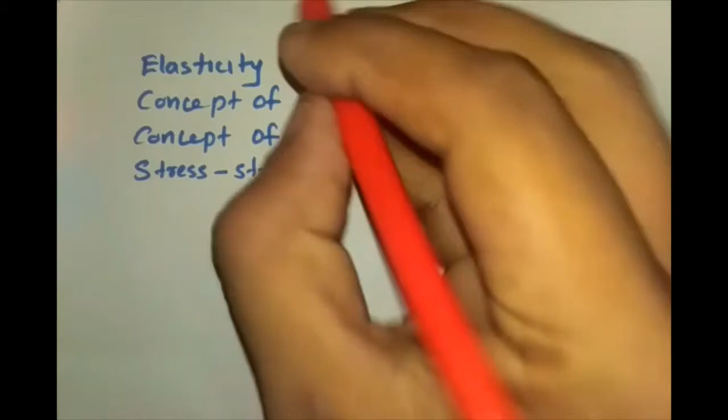Hello friends, in this tutorial we will be dealing with the basic strength of material concepts, that is elasticity, the concept of stress, what is stress, and concept of strain, and the stress strain relationship.

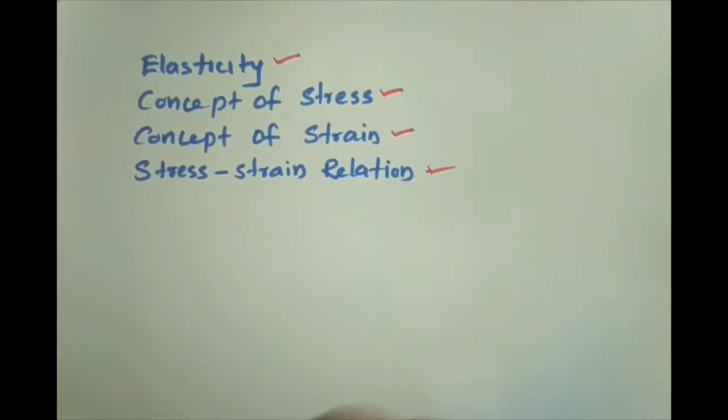So elasticity. What is elasticity? In simple terms, the property by which a body returns to its original shape after removal of the load is called elasticity.

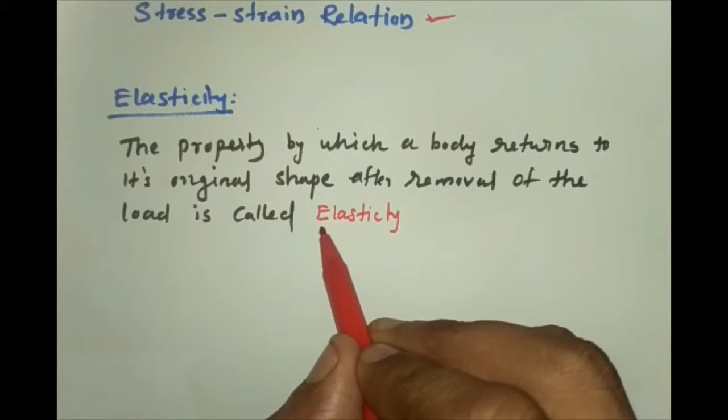I can give you an example. Here a hair ribbon is given, having a specific length. When you stretch it, this will increase the length, and when you remove the force, the shape will regain, so it will regain its original shape.

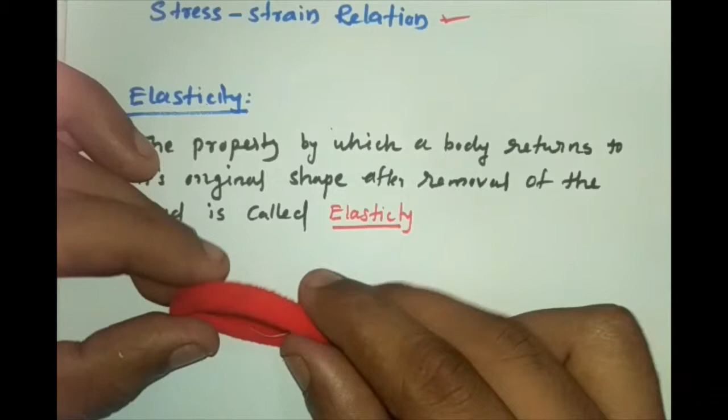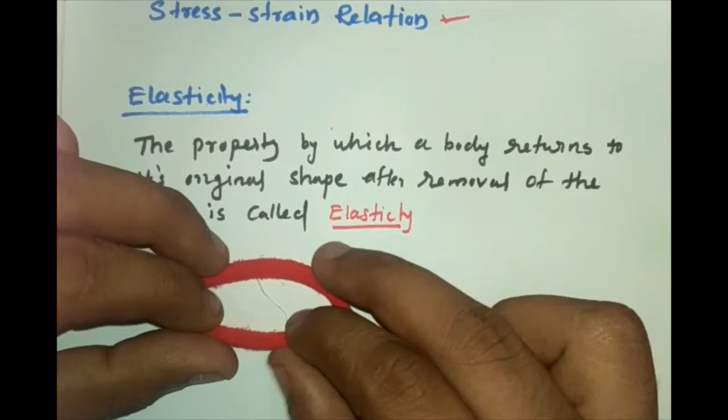So this material is an elastic material, and if it regains its fully original shape, having a length L, and when you stretch it and after removing the load, if it regains its complete original shape, then this is called perfectly elastic material. If there is a residual elongation even after the removal of the force, then that is not a perfectly elastic material.

Steel, wood, stone may be considered as perfectly elastic within certain limits. We will deal with the limit later.

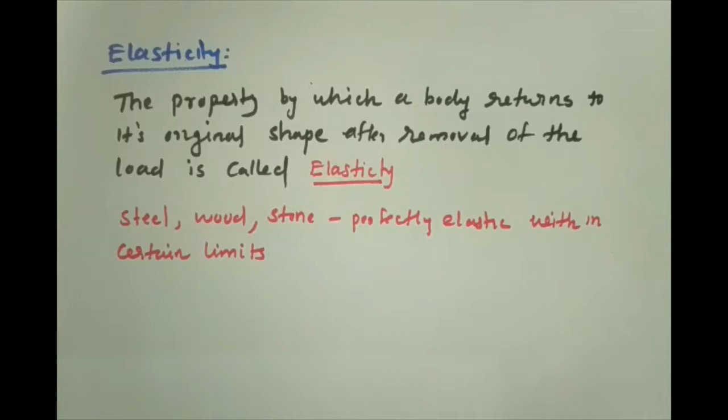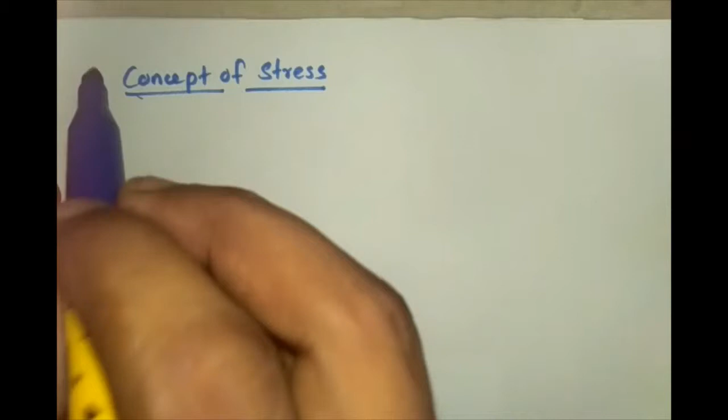Next is the concept of stress. What is the concept of stress? First, before that, I ask you a question: why do we need stress instead of force? This is a question for you, and after the lecture you will find the answer, and you can comment it in the comment section.

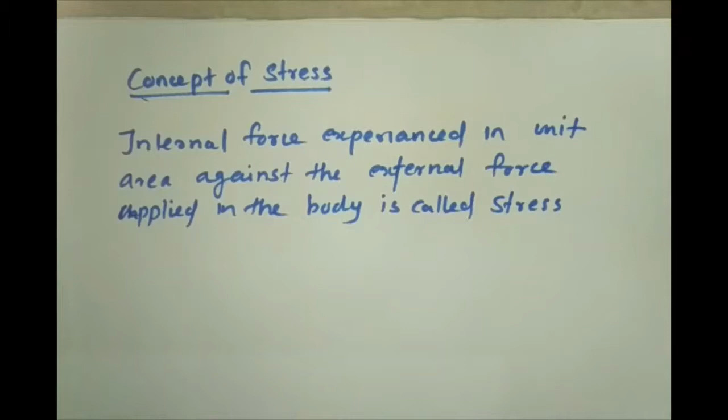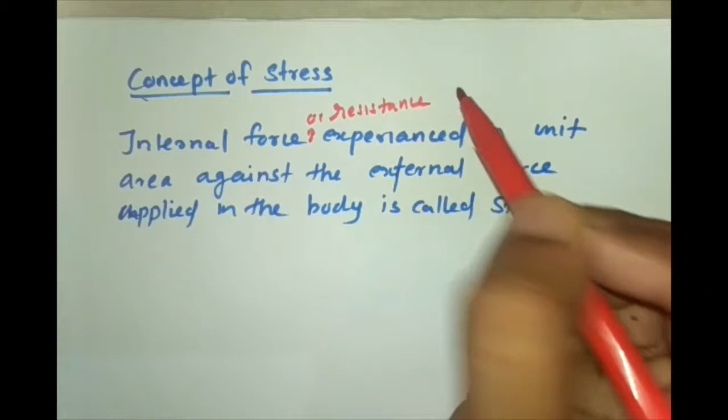So here we will deal with the concept of stress. Stress is the internal force, or you can say resistance, experienced in unit area against the external force applied in the body. This is called stress.

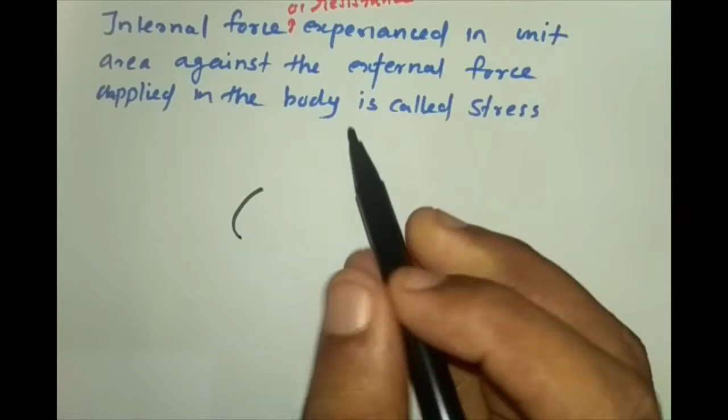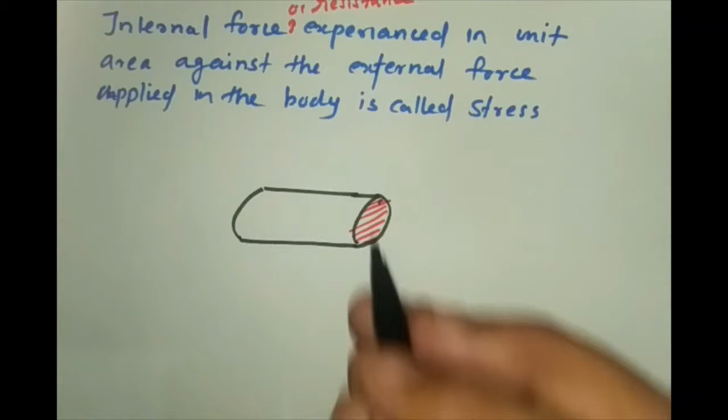So here you have a body having a cylindrical cross section area of A, and the force is acted in this way. If it is in equilibrium, the same force will be acting in the other direction. At the other end, P force will be acting here, and here also there is the same cross sectional area.

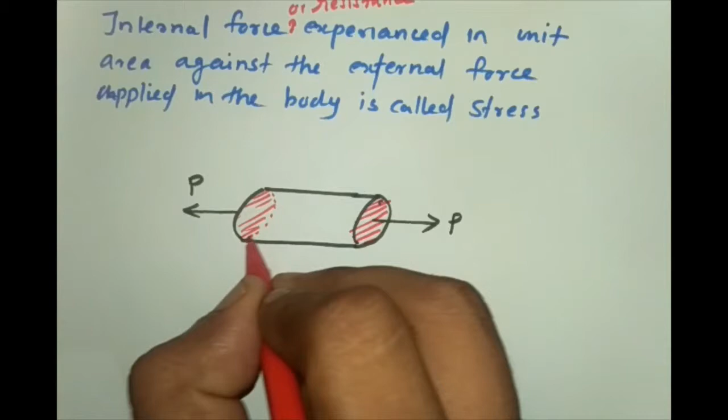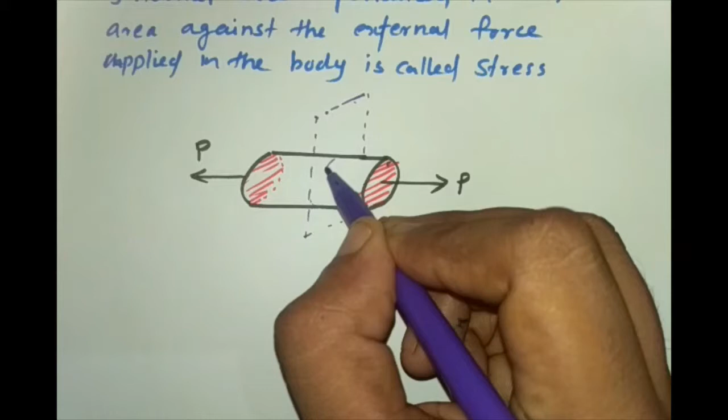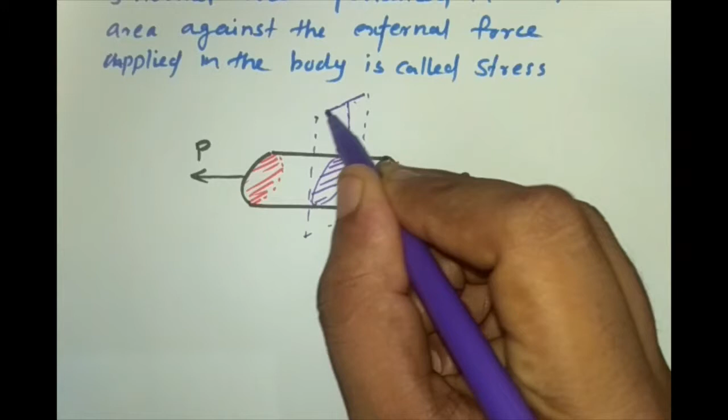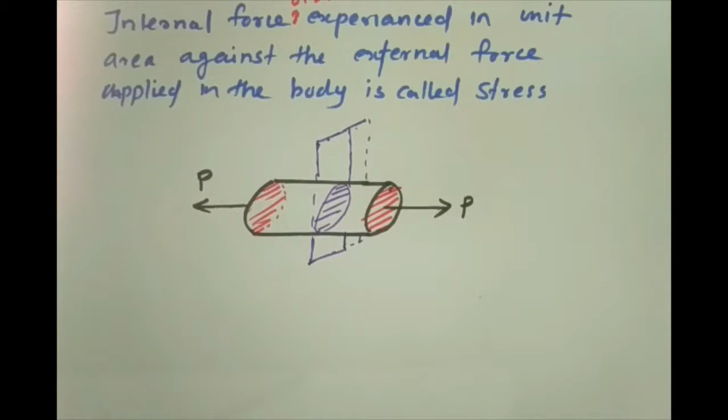Consider a section here. This is the section. The internal resistance, if you consider this section, the internal force, if you take this element, the same internal force will be also applicable here.

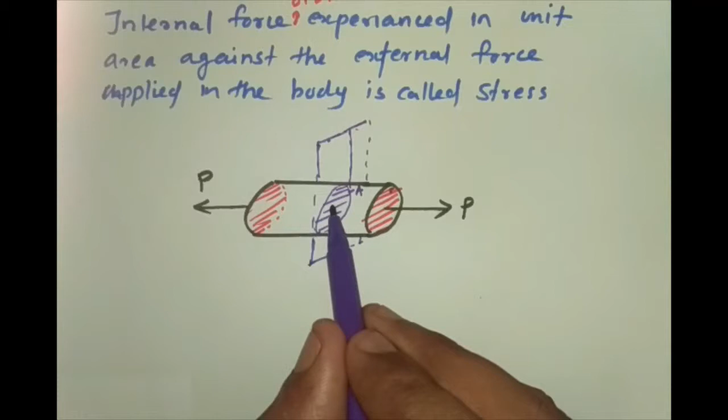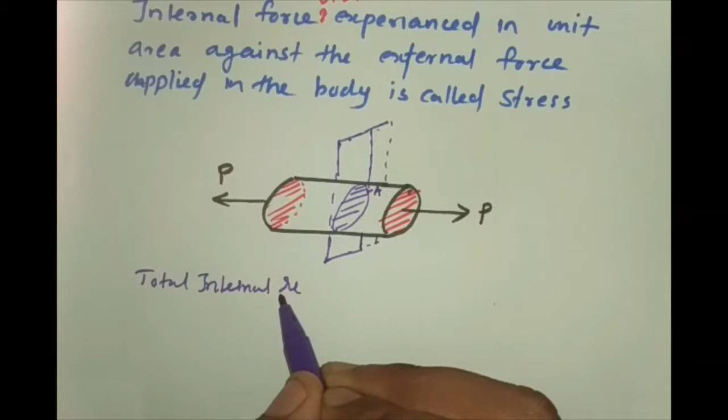So this has an area of A, and this P is acting, and at the intersection the internal resistance will be equal to P. So total internal resistance is equal to P, the total force acting, through an area of A.

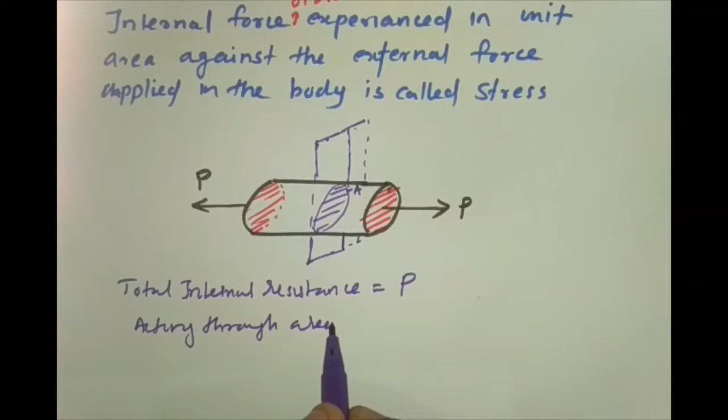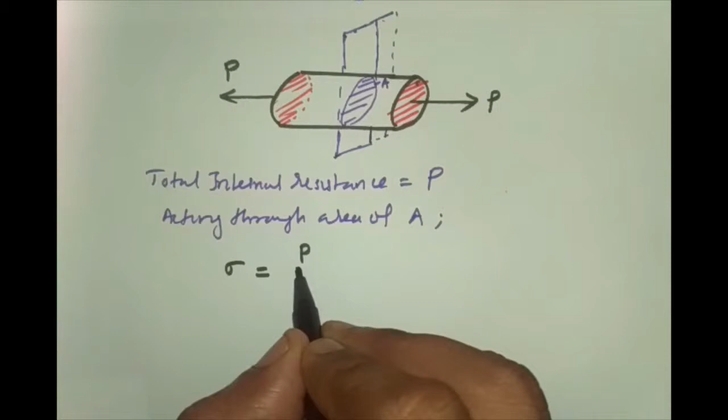So the stress, denoted by the letter sigma, is equal to the total force acting divided by the total area. This is the formula of stress.

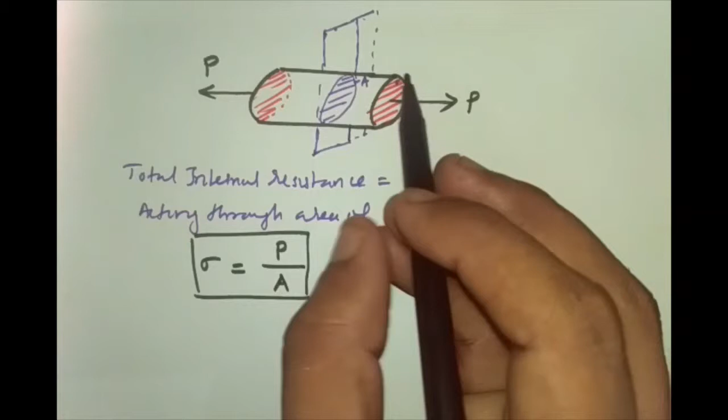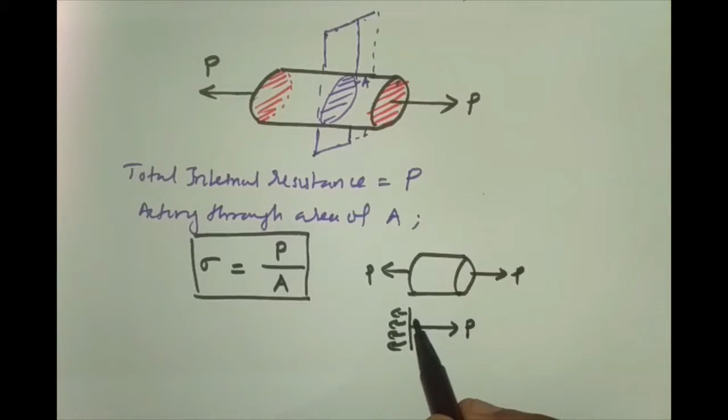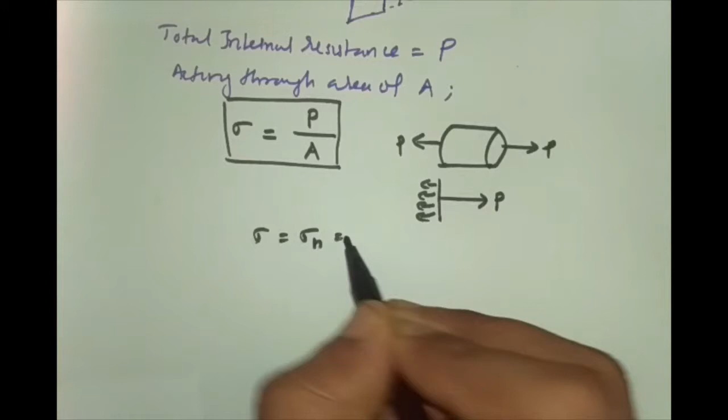Here we note, drawing the section again: this is P and this is also P, and you can see that this is the perpendicular cross. The area is taken perpendicular to the force, so you can easily find out sigma is equal to P by A, and the stress will be in this direction, perpendicular to the plane of stress. Since this is a perpendicular one, this stress is also called normal stress, so sigma or sigma n is equal to P by A.

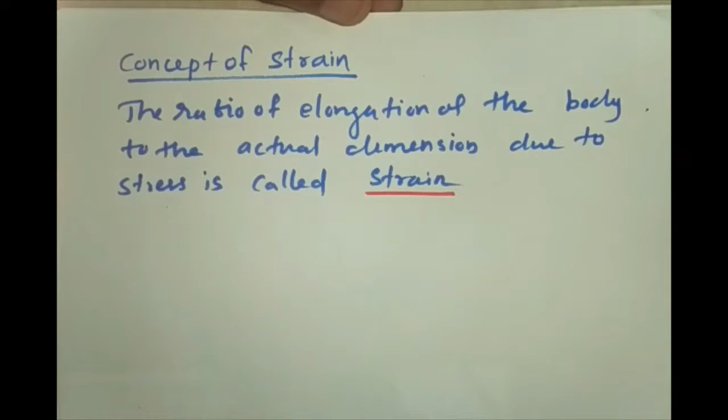What is strain? It is the ratio of elongation of the body to the actual dimension due to stress, called strain. So for that we have a material or an element having an initial length of L.

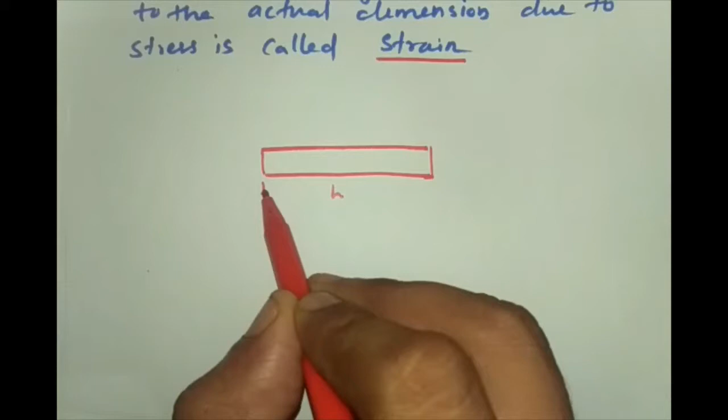It is applied by a force of P. At the end of application of the force, this got elongated.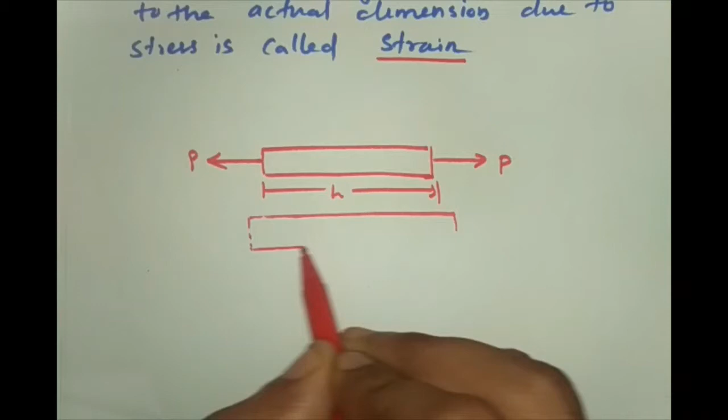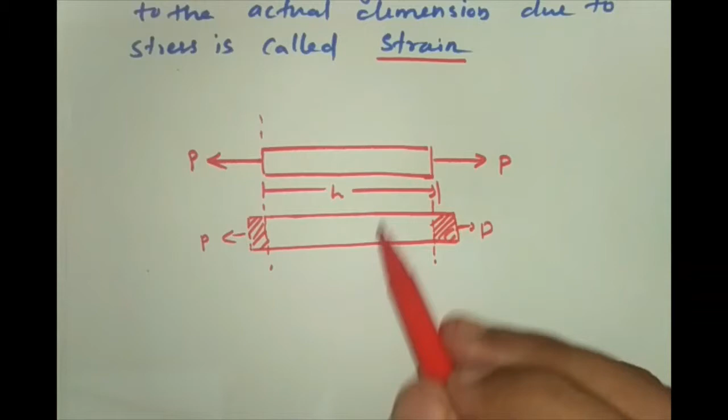This is called the elongation due to P, as you have seen when I talked about the elasticity in the example shown.

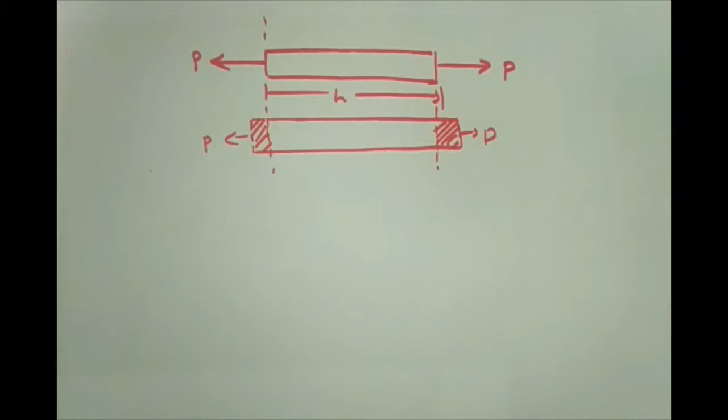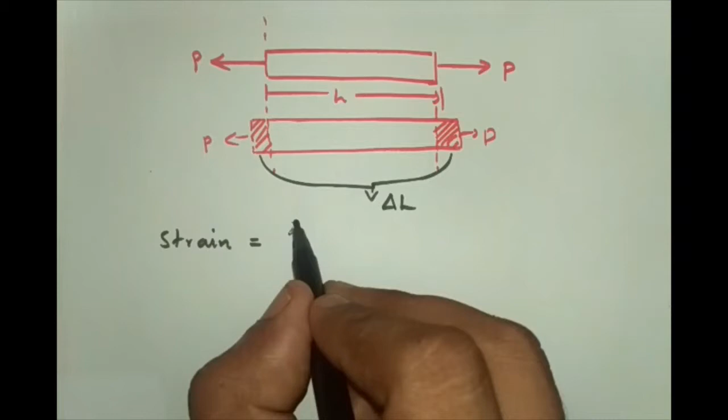This elongation is delta L. So the strain is equal to the ratio between delta L with respect to the actual length L.

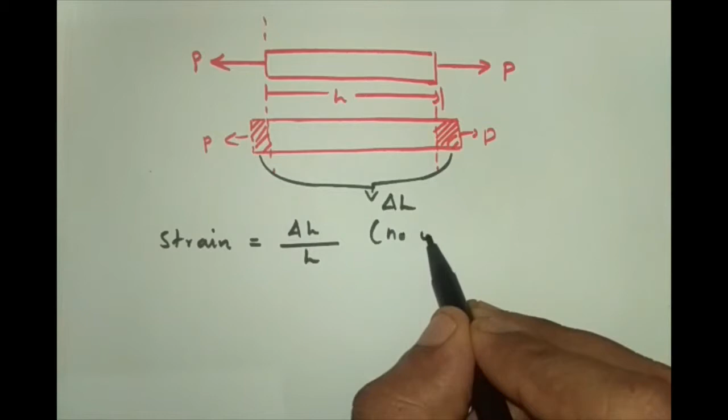So what is the unit of strain? The strain has no unit, because this is the unit of length, and here also unit of length, so it has no unit. It is generally represented in percentage elongation.

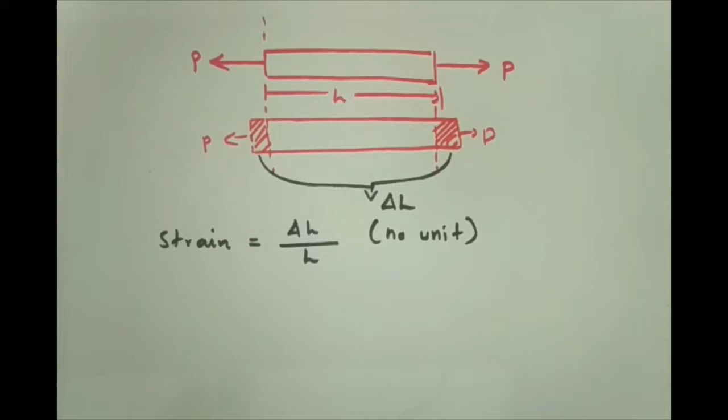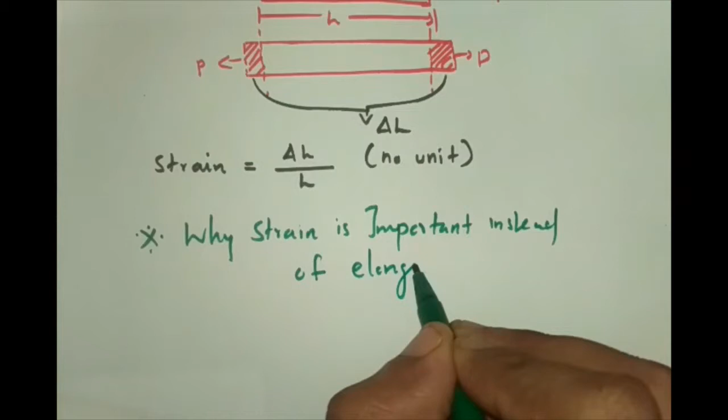Here I want to ask a question to you. Why is strain important instead of elongation? What is the significance of strain over elongation? I hope you will answer the question in the comment section.

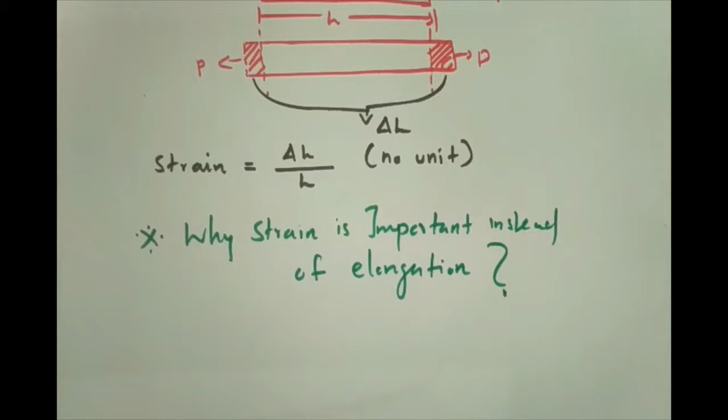Okay, so guys, I hope you got what is stress and strain. Now we will look into the relation between stress and strain.

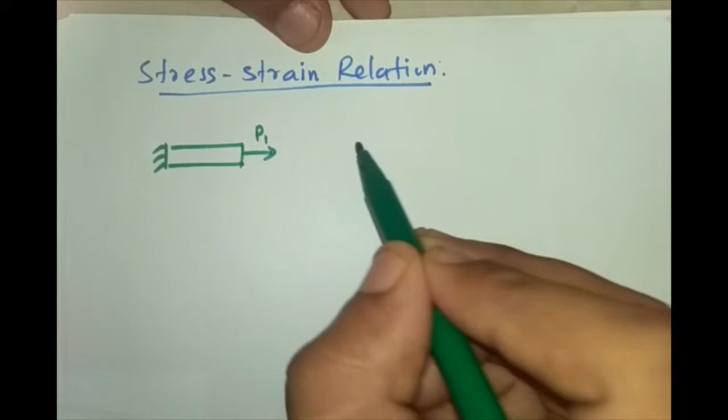For that we will see an example conducted on a prismatic bar. This is the bar, let's take this bar as gradually loaded. First load is P1, so this is the actual bar length. Now, due to the first load, it is deflected to delta 1 up to this much.

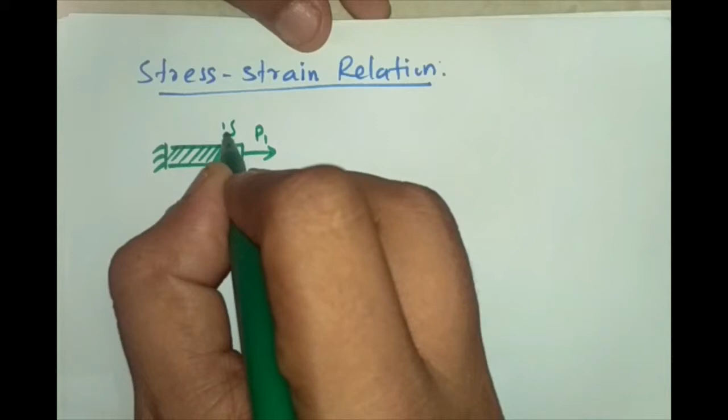Here the stress and strain are, the stress is sigma 1 and strain is epsilon 1.

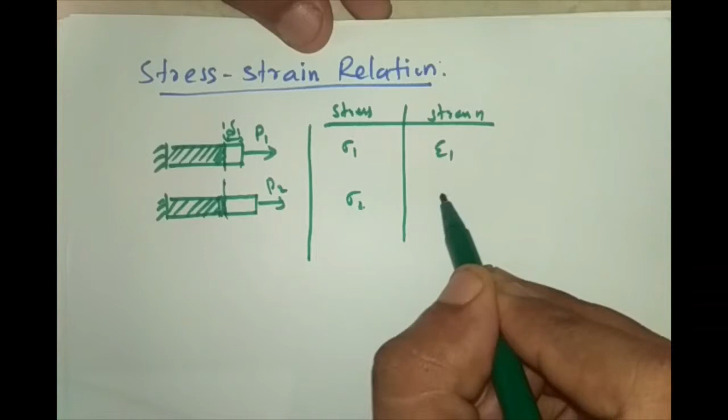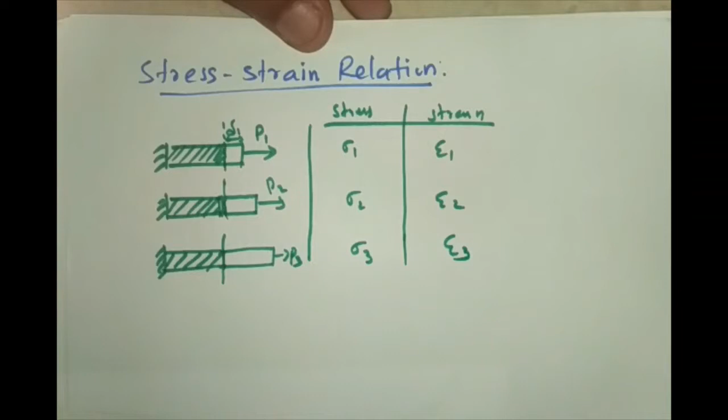Now the same member, the load is gradually increased to load P2, giving sigma 2 and epsilon 2, and again increased further, giving sigma 3 and epsilon 3. So here you see the gradually increasing stress and strain of a prismatic material subjected to loading P.

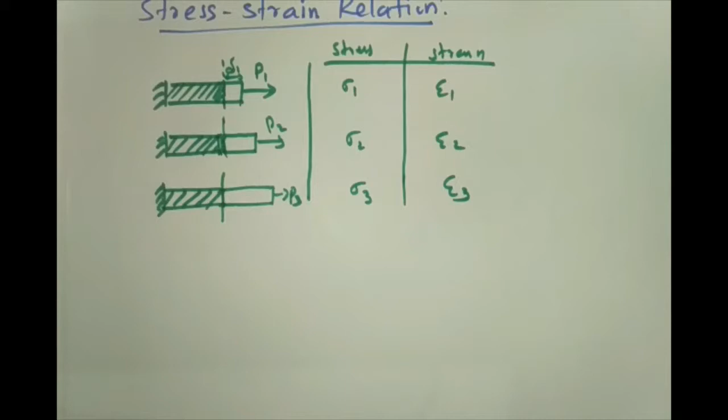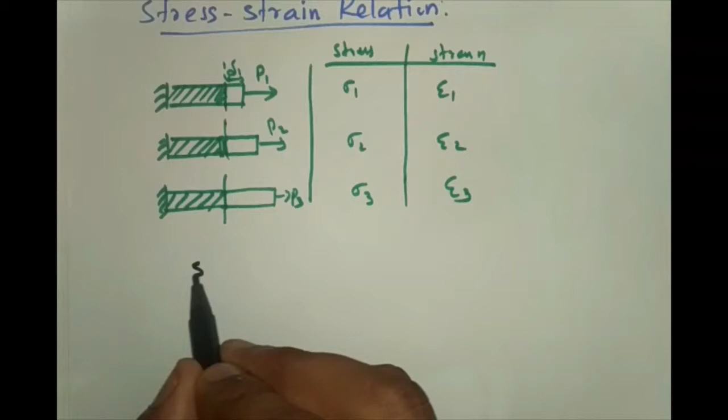What we see here is that when you increase the load or the stress, the strain is increasing, and this strain is directly proportional to stress.

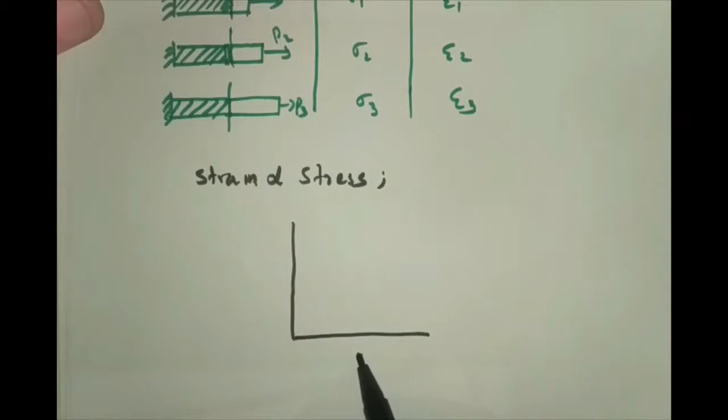You can plot a graph if you have strain and stress, and if you plot the graph for the prismatic bar, you can get a diagram like this.

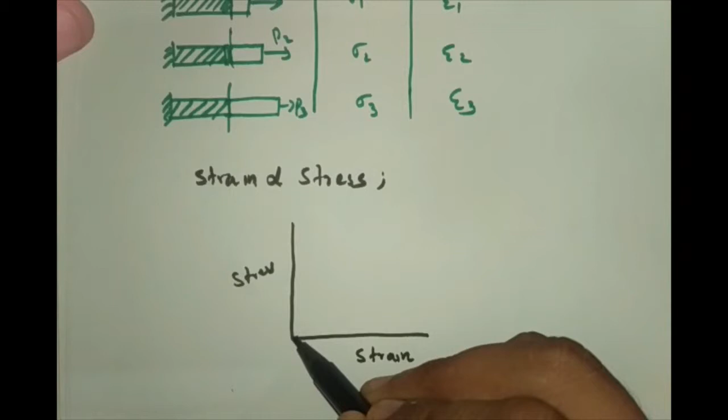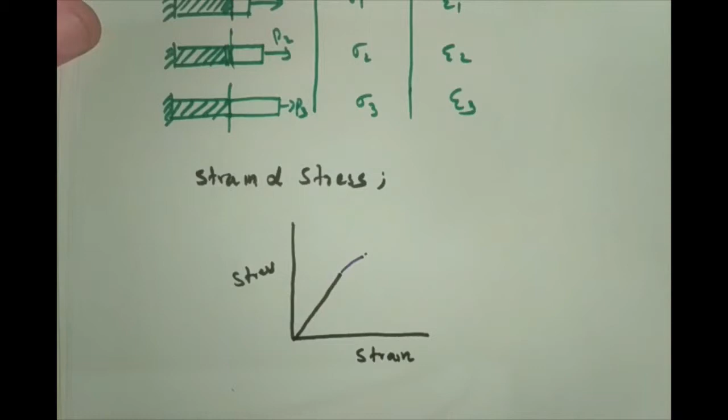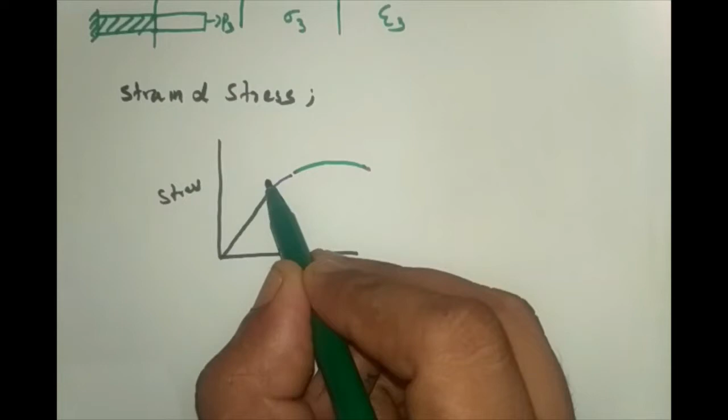In the graph, you can see that up to a certain limit, the stress is directly proportional to strain. That means the slope is constant here, so the slope is constant and stress is directly proportional to strain.

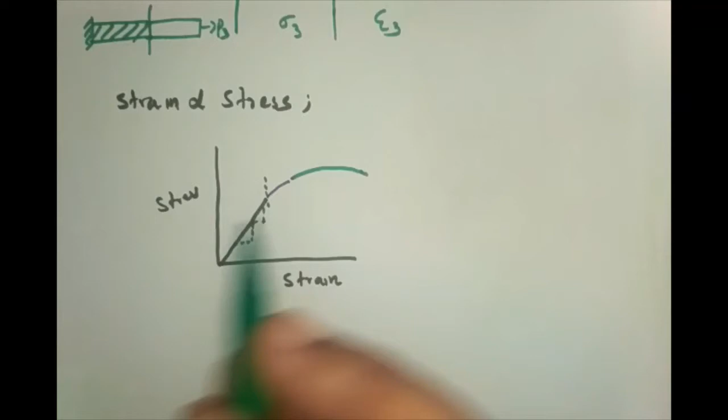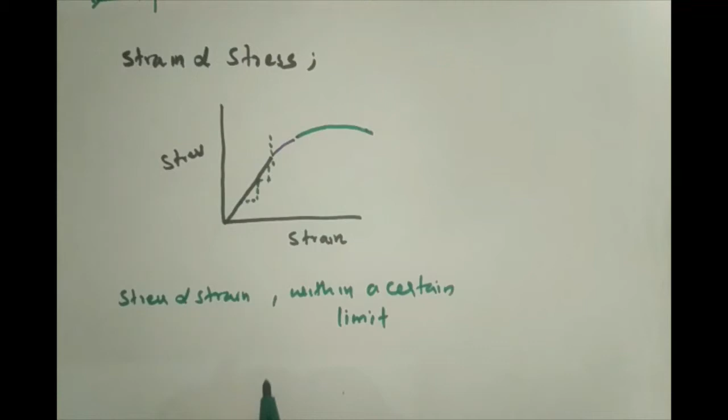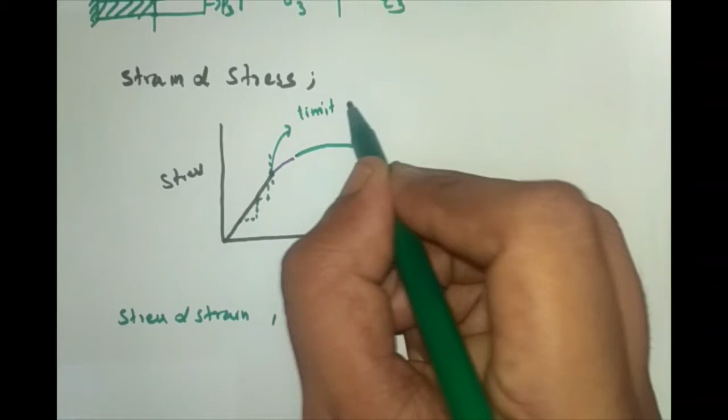The stress is directly proportional to strain within a certain limit, up to this point. This point is known as the limit of proportionality. So up to the limit of proportionality for a given loading, the stress is directly proportional to strain.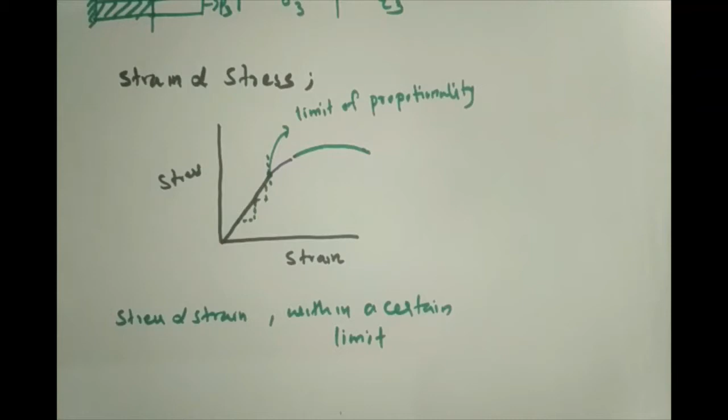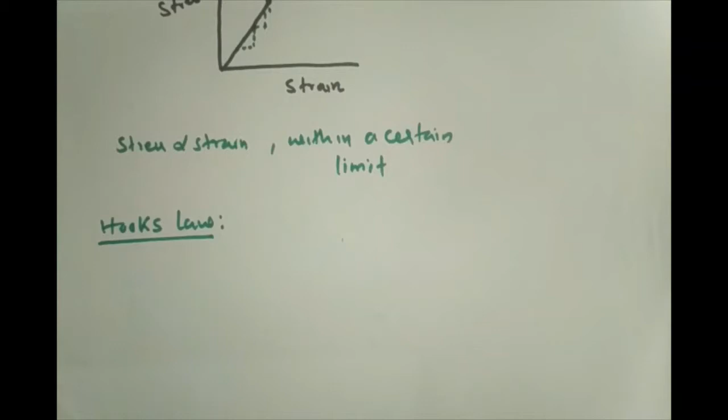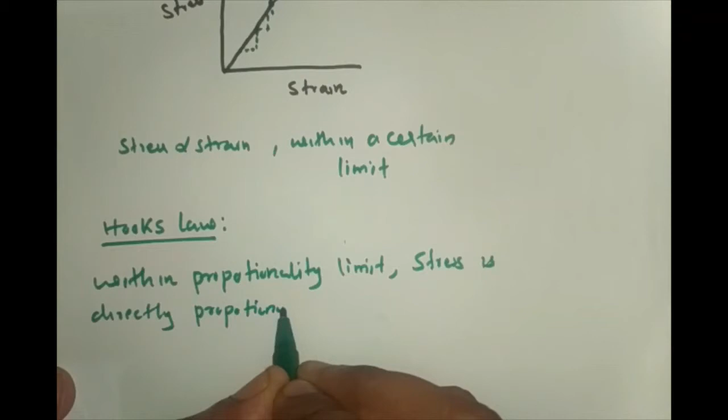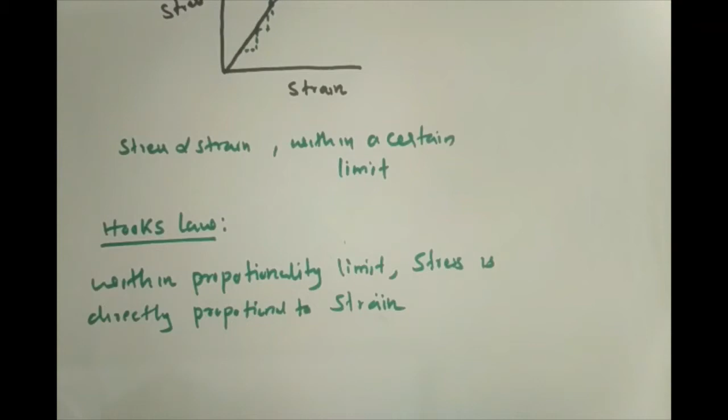This concept was introduced by Hooke, observed by the scientist Hooke, and this is known as Hooke's law. So what is Hooke's law? Hooke's law states that within the proportionality limit, the stress is directly proportional to strain.

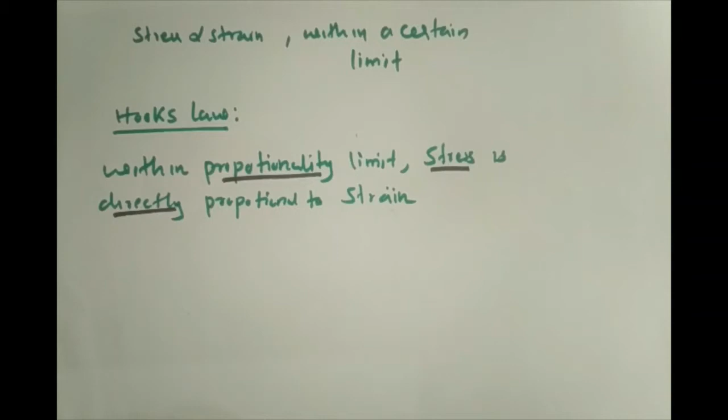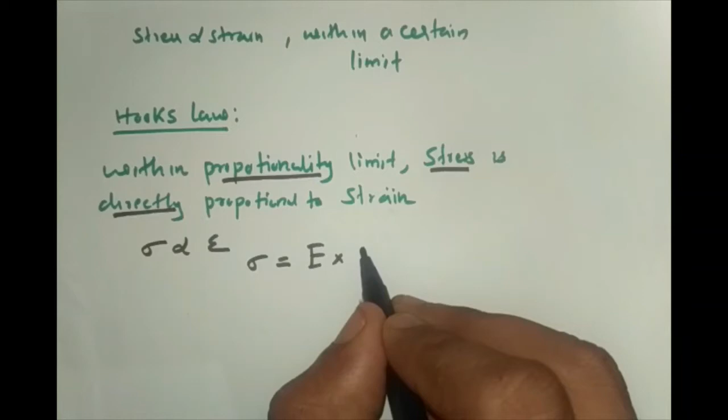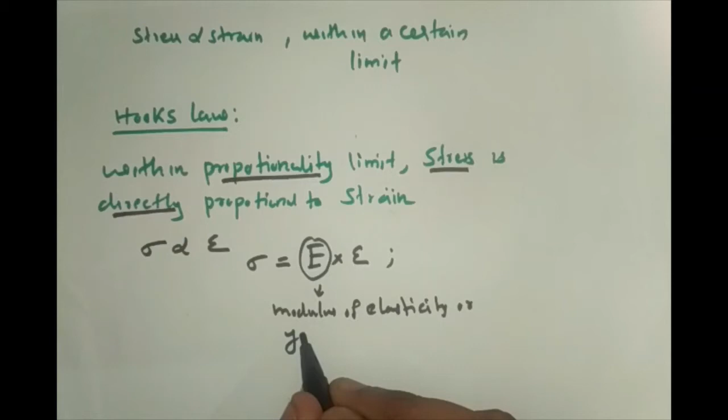Is stress sigma directly proportional to epsilon, that is strain? Mathematically, sigma is equal to some constant, which we can take as E into epsilon. Here this E is known as the modulus of elasticity or Young's modulus, that is the modulus of elasticity.

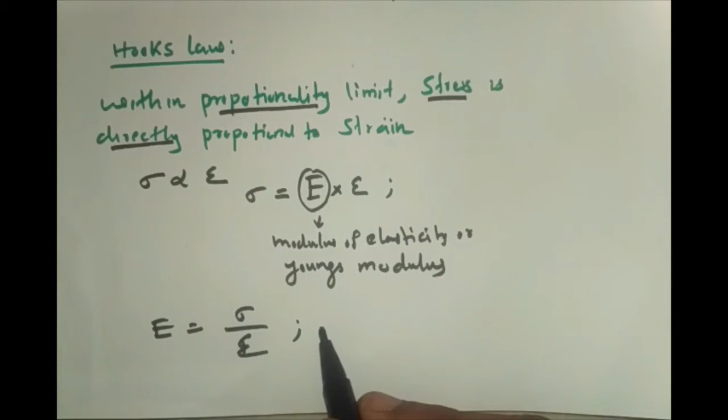E is equal to sigma by epsilon, or the stress divided by strain is called the modulus of elasticity. It is in the case of axial stresses or normal stresses and strain.

So we have seen what is elasticity, what is the concept of stress, what is the concept of strain, and now the stress strain relation.

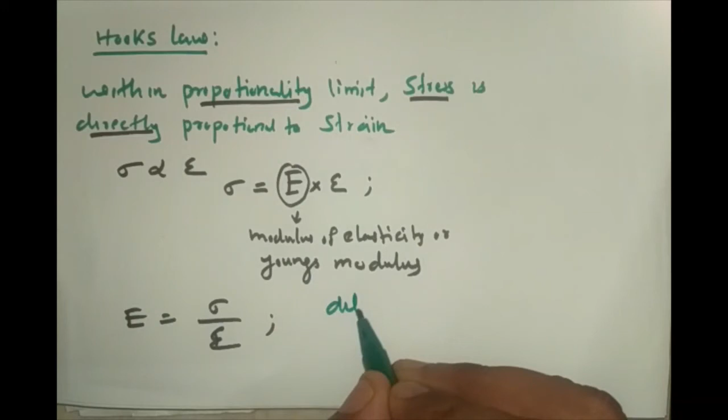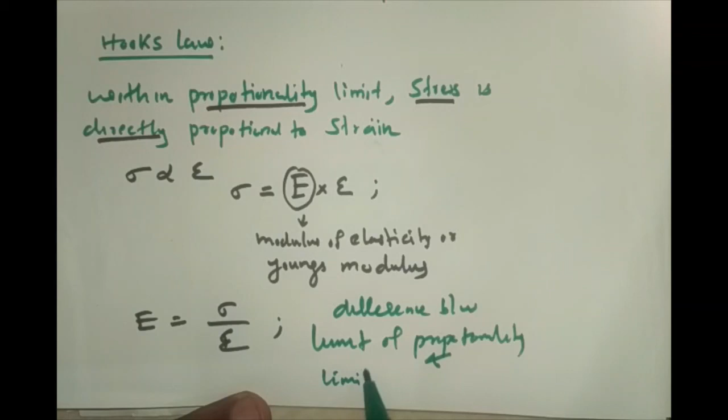In the stress strain relation, I wish to ask a question to you: what is the difference between the limit of proportionality and the limit of elasticity? I hope you will comment it in the comment section.